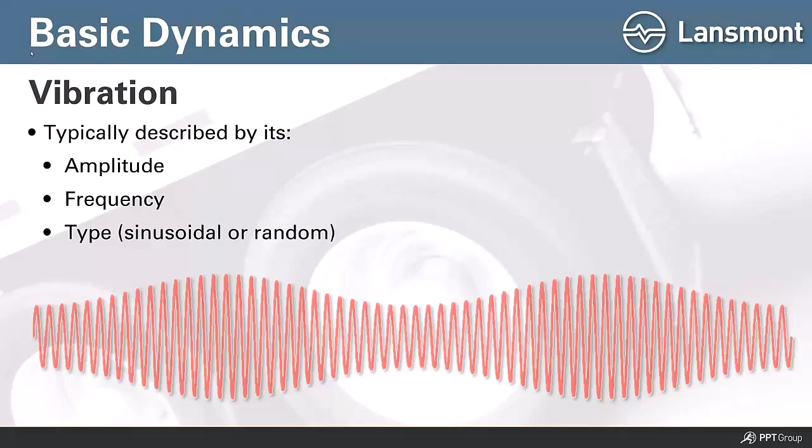And then lastly, two different types of vibration. Today I'm going to talk mostly about sine vibration, sinusoidal vibration. But we also describe vibration in our testing world in terms of random vibration. And I'll differentiate between the two as I move forward here.

So this is what sine vibration looks like. Sinusoidal vibration, that's basically a sine wave of a very specific discrete frequency. And it's, you know, what you can imagine, up and down. You see the sinusoidal pattern, it's repetitive.

And that motion we can replicate or simulate in the lab on a vibration test system, but that motion really does not occur like that, that discretely, in, let's say, the transport environment. You might see bits and pieces of that, but it's really for us used more as an engineering tool. If we're going to use what's called sinusoidal vibration, we use that in the test lab as an engineering tool versus using it to simulate anything in the real world.

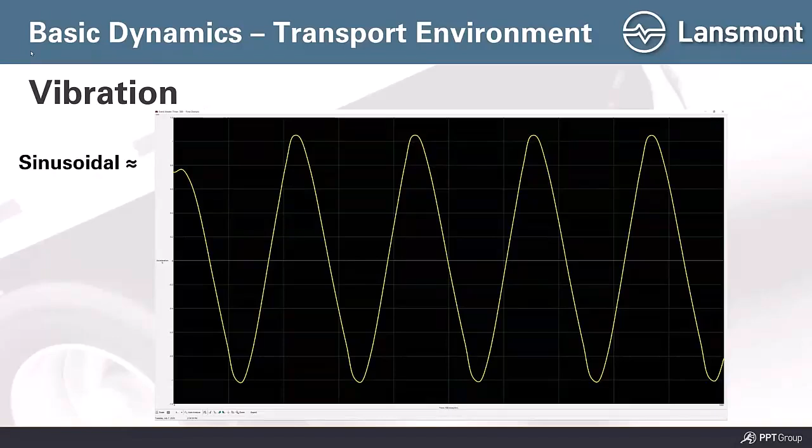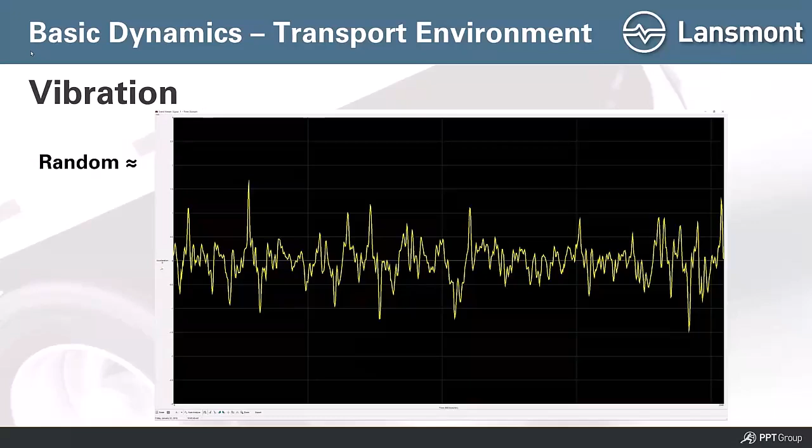What does a delivery van look like? What is a steel spring truck, an air ride truck, maybe a truck in China, maybe a truck in India, maybe rail cars in Europe? We use a summation basically of all that noise that we record from the real world and come up with these test profiles that simulate those environments.

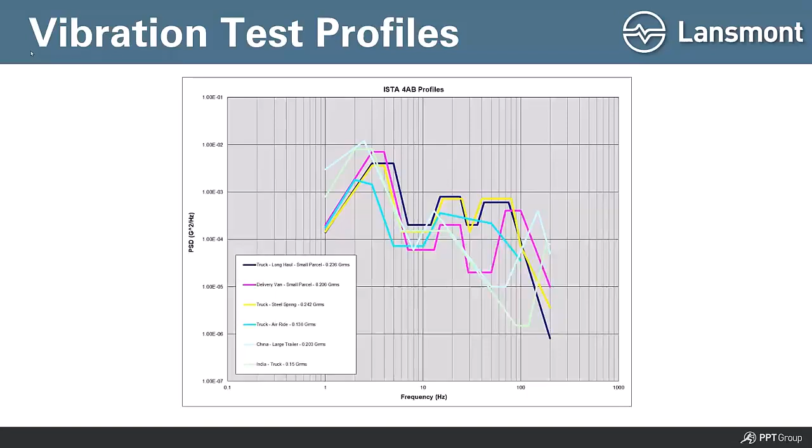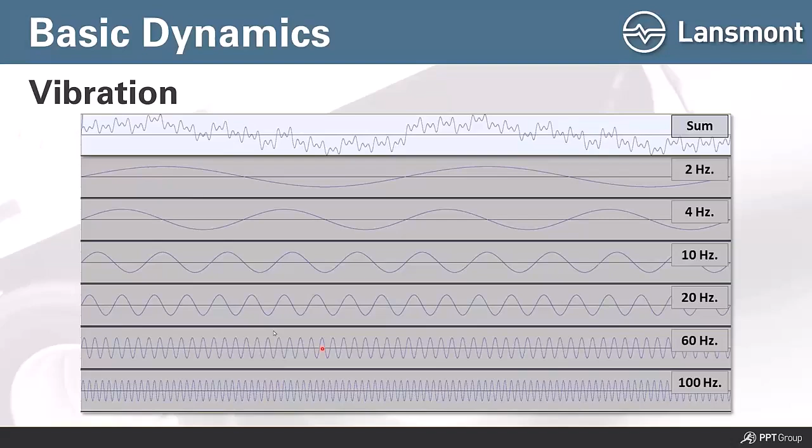If you look at this top signal, think of it as more like noise or a real world signal that you might measure out in the supply chain. That signal is made up of some of this 2 hertz signal, some of this 4 hertz signal, some of this 10 hertz, some of this 20, 60, 100 hertz. All these different types of sinusoidal vibration content are evident in that signal. And so computers, with proper analysis, are able to look at that messy signal and pull all of this content that you see down below here to build these types of summary profiles.

So when we look at this signal, if I show those same signals, we can say, that top waveform that I'm looking at here, the 2 hertz content, basically is a summary of that 2 hertz content we use to create a breakpoint in our PSD profile that simulates air ride transport. We also can do the same thing for the 4 hertz content, the 10 hertz content, the 20, the 60, and the 100 hertz.

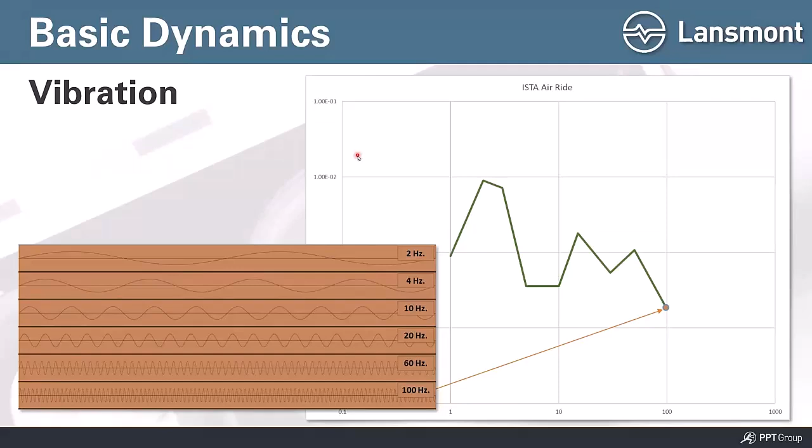So basically, we do the statistical kind of analysis on real world data, dissect it, looking at different frequency bandwidth filters, to say, what does the 2 hertz look like? The 4, the 10, the 20, the 60, and the 100 hertz? What do those different types of inputs look like? And we plot them on one of these PSD profiles.

Why are there these high points here versus maybe low points here? When we look at these kinds of plots, the y-axis is intensity. So why is there a higher type of input here versus down here? Well, that's because in this case, an air ride truck transport, these are the airbags. This is the suspension underneath a vehicle, and that's where you see big input at that specific frequency. It's related to the suspension of the truck.

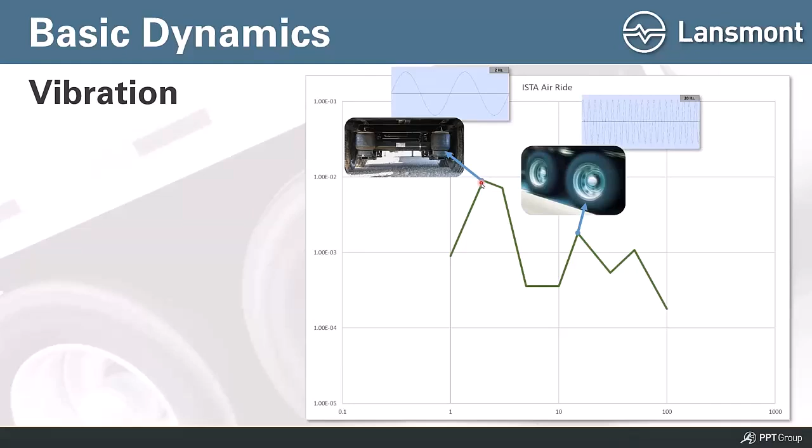Well, what about the next little bump? Well, that next little bump is related to input from the tires, the rotation of the tires or the wheels as they spin at different speeds.

You see very specific types of higher input, or comparably higher input, at that frequency range. And then even at the higher frequency range where there's another peak, you can relate that more to the structural rigid body members of a transport vehicle, like a truck trailer: the underneath of the frame of the structure, the side walls, everything that goes to hold that trailer together rattles, or responds to input as it's moving down the road. And you see that type of input at that frequency range.

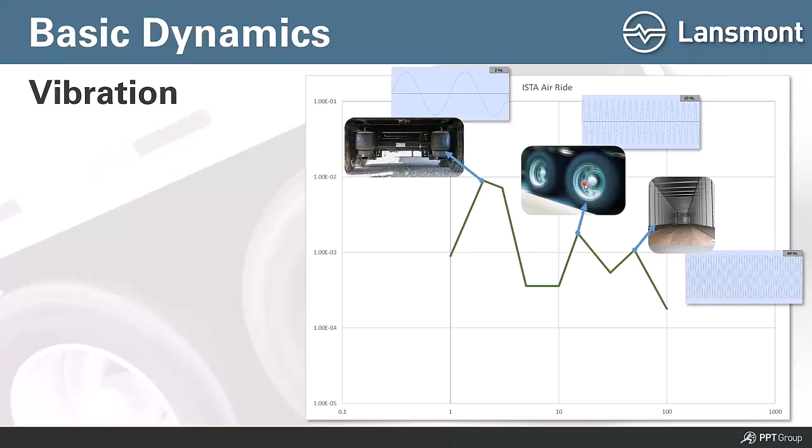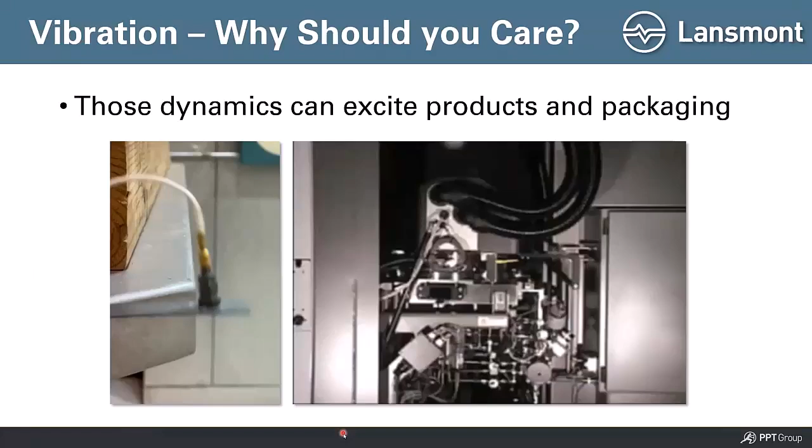The video on the right is actually a video of the inside of a piece of very expensive test equipment that's being tested on a vibration system. I'll play it now, and you can get an idea of how much different bits and pieces of tubing and hardware inside here move in response to a vibration test input. So all those pieces inside are shaking, they're resonating basically at, in this case, a specific frequency.

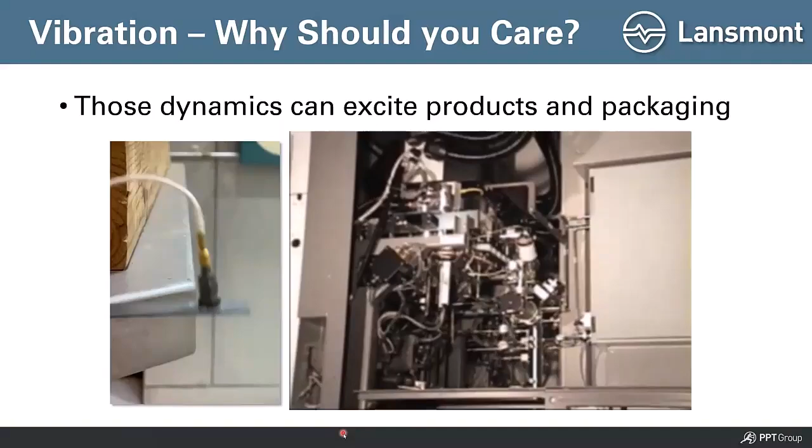And so it's important for us to understand at what frequencies these different pieces and components get excited and how excited they get from an overall amplitude perspective. So we want to know what frequency they like to shake at, and we want to know at that frequency how excited they actually get. And there's a method to how you go about making those determinations.

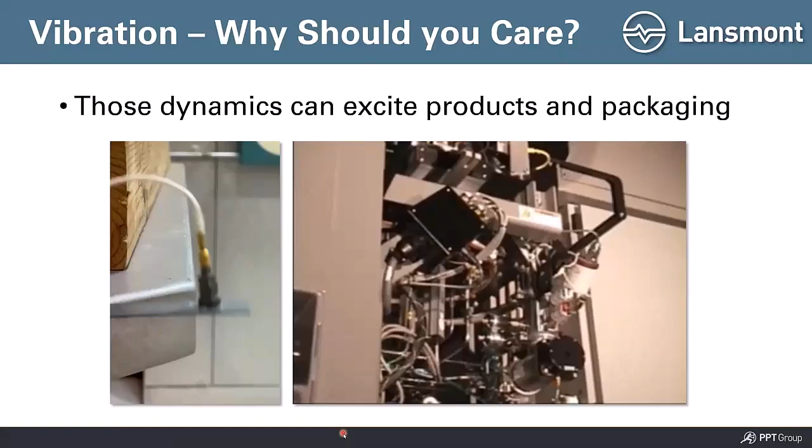In the laboratory, and I'm going to actually show you how we go about this, we're able to generate these resonant frequency transmissibility plots. And basically when we do that, what we're trying to determine is the frequency at which something gets excited, which I'm showing here, and the amplitude, which we describe in terms of what's called transmissibility.

So if we put a product on a table and move that table at a controlled amplitude, and the product or component on the table is shaking the exact same way and amplitude as the table, it's got a 1-to-1 ratio of the response of the component to the table input. At some point, the response of that component or product is going to be greater than what the table is inputting into that product. And so that's what we're trying to identify with one of these transmissibility plots: what is the frequency where that component gets excited, and what is its overall amplitude.

And this is the only real math I'm going to include in this, and it's meant just to show the relationship of how you determine the natural frequency of a spring mass system. Forget all the math in there, but what it says is natural frequency is 1/2 pi times the square root of, and K stands for spring constant, meaning the stiffness of a spring. G is a constant, acceleration due to gravity, and then W is the weight that would be placed on that spring. So in a spring mass system, you have a spring and you have a mass. The spring is defined by K, and W is defined by the mass of the item.

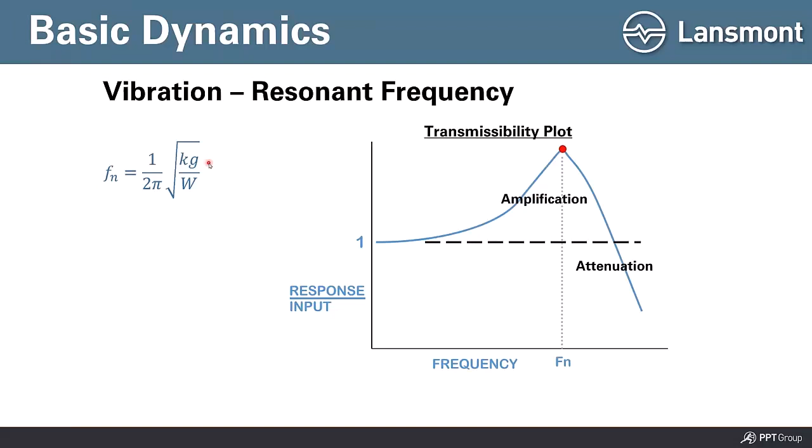So here's my first video showing what that might look like as we try to determine the natural frequency of a spring mass system.

What I'm showing on the screen are 3 different spring mass systems mounted to a vibration table. In each configuration, the spring, K, remains the same. But what's different here are the masses. There's a heavier mass here, there's a lighter mass here, and there's an even lighter mass in this situation.

So understanding that relationship, you would expect that this spring mass system would have a lower natural frequency than this one, and this spring mass system would have a lower natural frequency as compared to this one. So now I'm going to play this video, and what you'll see and hopefully be able to hear is that the table is sweeping, meaning it's changing its frequencies over time from lower to higher frequencies, and you'll see the response of the springs change as a result of that. So I'm going to go ahead and play that now.

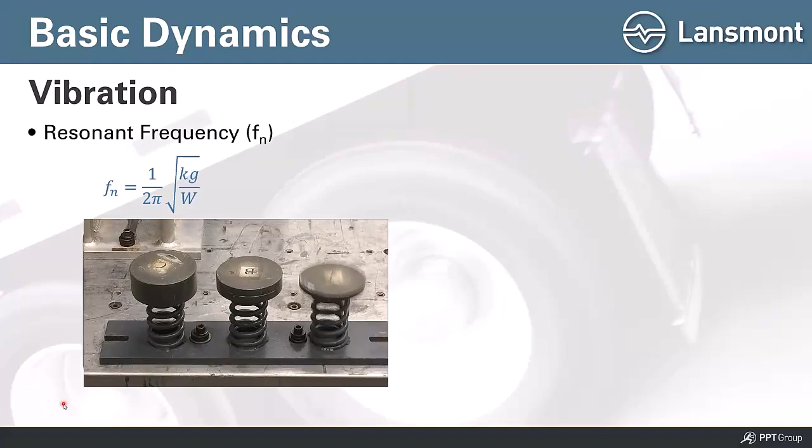So you can see that each one of those springs got excited at different frequencies and in different frequency ranges. And we're able to document that by what are called transmissibility plots. The plots on the right were actually generated from a vibration test system, and they show the individual transmissibility plots for each of those spring mass systems. The first one, the heavyweight green one, had a natural frequency of 28 hertz. The middle one, 35 hertz, and the light one at 46 hertz.

And so we're able to document that, and again, this demonstrates that whole relationship of K being the same for those 3 systems, but heavy mass, bigger mass, lower natural frequency. This one, middle mass, a little bit lighter, a little bit higher natural frequency. And then the very light mass, so the smaller this number is, the bigger that number becomes. So that kind of validates that whole relationship.

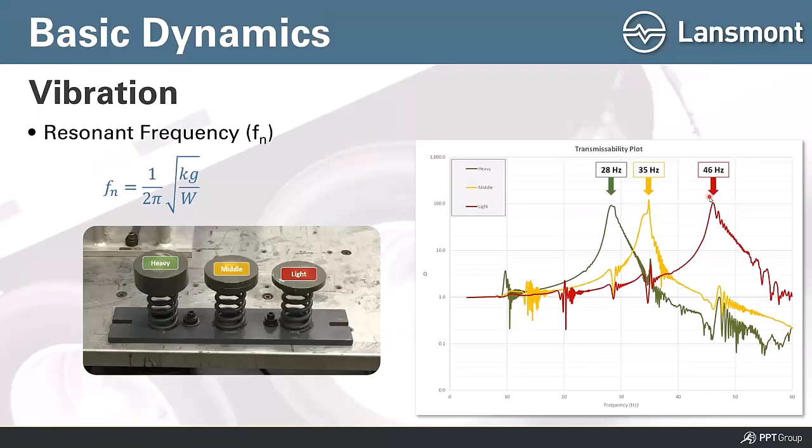You basically shake your table doing a sinusoidal sweep from 3 hertz on the low end at a constant acceleration level, G level, and you sweep to a high end frequency breakpoint of 100 hertz. You can change those depending on the range that you really want to address from your testing perspective. But for the transport world, 3 to 100 hertz is considered to be a pretty good wide dynamic frequency range, where you would probably see the most significant inputs from any transport vehicle.

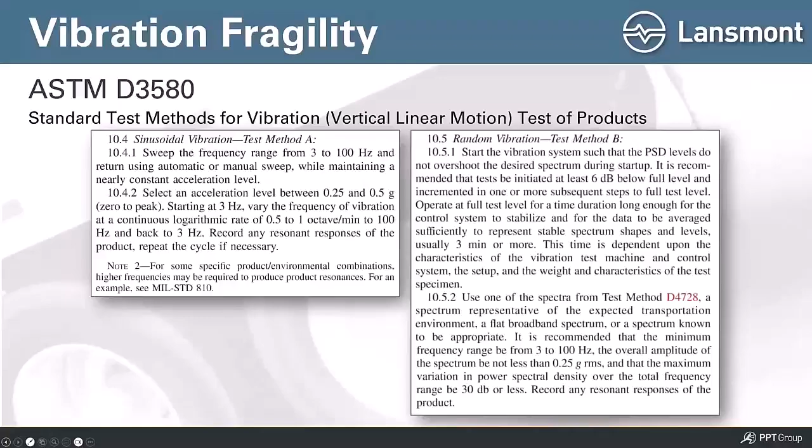You can hear it. Oftentimes you can hear things when they resonate, and you can use sensors, which I'll show you, basically accelerometers attached to your products to measure the response when you're putting it through the sweeping inputs. This is the type of vibration. This is a vertical vibration test system.

Obviously, a number of different types of vibration systems. This is a Lansmont system, pretty big one, or middle of the road for us. They can be as small as 23 centimeter square tables, upwards of large enough to test big, let's say, displays from LG, Sony, Samsung. Large displays, they can be 200 centimeters square, quite frankly, if you have products that large that you can shake on these tables.

So you use machines like this, and here's just going to be a video showing what the sinusoidal input looks like. It's going to start by showing you what the table looks like when it's moving, just for visual perspective, at 1 hertz, and then 2 hertz, and then 3, up to 5, to show what those different frequency inputs look like. And then I'll play back a whole sweep from 3 to 100 hertz in a sped up fashion, so you can get an idea what that looks like.

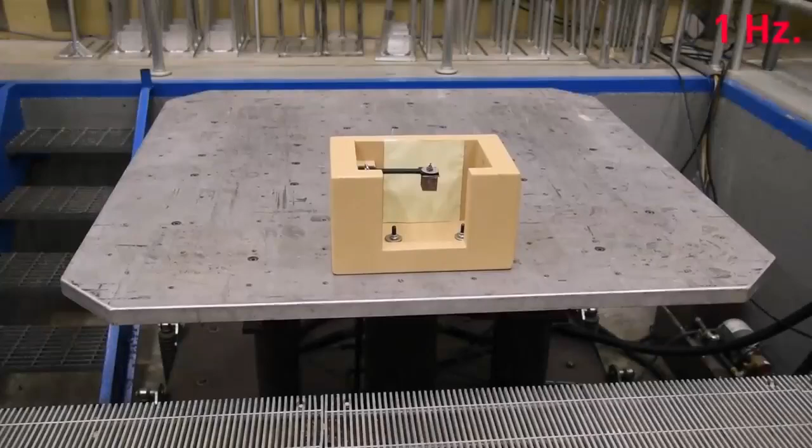That's a 1 hertz motion. Up and down 1 time every second. That's 2 hertz. Up and down 2 times every second, so on and so forth. Now this is playing back a complete sweep from 3 to 100 hertz, but at 5 times normal speed, just to give you an idea what's taking place.

And I'm going to, if I can pause it, sorry, with my, I think was my laser pointer.

What you're seeing is the white horizontal line is the demand, what we're asking the vibration table to do, which is a sweep from 3 hertz on the left hand side all the way out to 100 hertz on the right hand side. And this line here is what we call the demand line. That's basically saying, in this example, we want the table to shake with an intensity of a half a G of input, vibration intensity, across that whole frequency range from 3 to 100 hertz. So we sweep across that whole frequency range.

And this is basically to try to show a simplified spring mass system on a vibration table, and we're looking at the response, in this case, visual. So this is just showing what the mechanics look like from running the test. What's being displayed right now is what we call the control channel, or the accelerometer that's mounted to the table, that's controlling the table to do a very specific thing. There's no data right now shown on the screen to display what's happening with our spring mass system on the model over here. So I'll show you that moving forward.

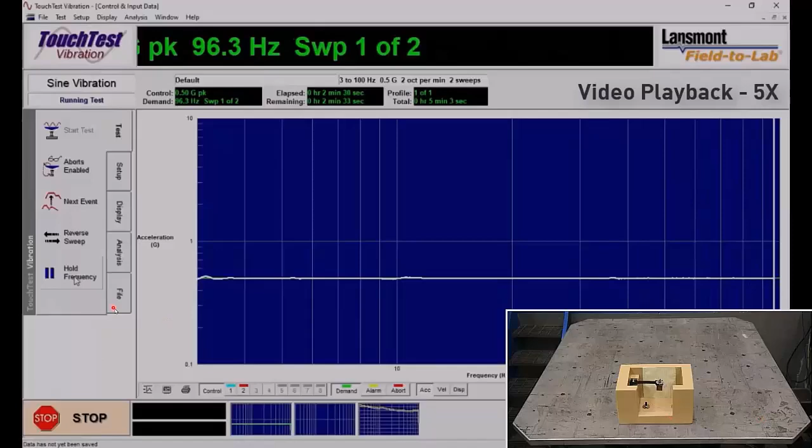How do we go about doing that? We use things that are called response accelerometers. This is a teeny little transducer here. PCB is the brand in this case. A little transducer that we can plug in to our control system, and then we can attach it with a cable to our spring mass system, which is what I've done here. And now I have an instrumented setup that's going to allow me to measure, not just visually or audibly, but measure with my vibration control system what that resonance is and what the amplitude is.

So now, if I play a video showing that, on the bottom right, you'll notice that the display looks different, because I'm plotting data coming from that sensor. I'm going to speed the video up. It's a slow process, so I've sped it up here 4 times. And here about 10 hertz, you see the red trace going up, and there's resonance of that beam, spring mass system. You can see how it gets excited at that frequency. And then stops.

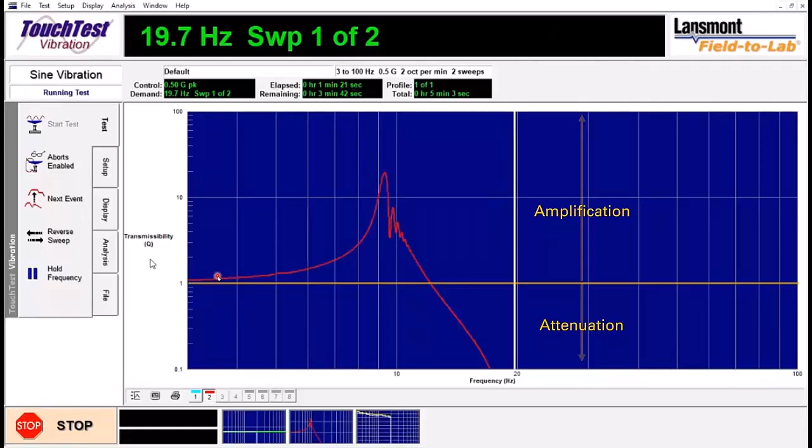But anytime that the signal goes above that line, that's an indication of amplification, where the beam is now getting excited at the end of that beam where the mass is. So above that 1-to-1 line, amplification. Below that line is what we call attenuation. So attenuation is actually where the energy that you would measure out at the end of that beam is less than being put into the system.

And so in this case, what I'm really interested in, of course, is where is the natural frequency of that beam. In this case, I can identify that at this frequency. It was just a little bit more than 9 hertz. And if I look at the y-axis, that also says the amplification or the transmissibility was about 20 times, almost 20 times. So at that frequency, about 9.3 hertz, the end of the beam was shaking almost 20 times more than the table was inputting into the system. So that's an indication of a pretty significant amplification at that point.

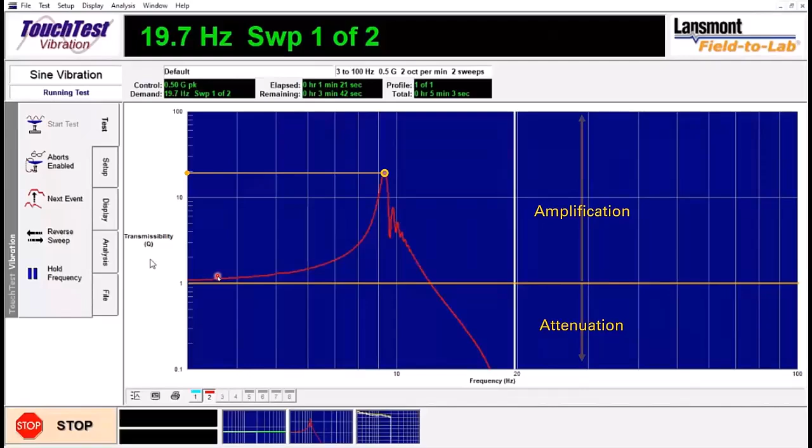So there's my simple, modeled up spring mass system, a product, so again, a beam suspended, a mass suspended at the end of that beam. When I say beam, you can think of this as the spring constant, right? It has to do with the stiffness of this system. Instead of it being a spring, it still basically acts like a spring. It's a beam with a mass suspended off the end of it. And you saw how that shakes in the previous videos.

So what could I do? If I understand this relationship again for the spring constant, what could I do if I wanted to change the natural frequency one way or the other? If I wanted to raise the natural frequency, stiffen it up, one thing I could do is shave some of the mass off of the end that I'm suspending. If I make the mass lighter, so this number would go down, the natural frequency would go up. So that's one way to stiffen the system.

Another way would be just to add a structural member, right? If I have an issue like a real product, maybe a circuit board or something in the back of a piece of equipment that's suspended like that, maybe a power supply, it might be a hard drive, any kind of component that is cantilevered or suspended. If you add a structural member, what that's doing is raising the stiffness. So that would make this number, the K, spring constant, stiffer, which would raise the natural frequency.

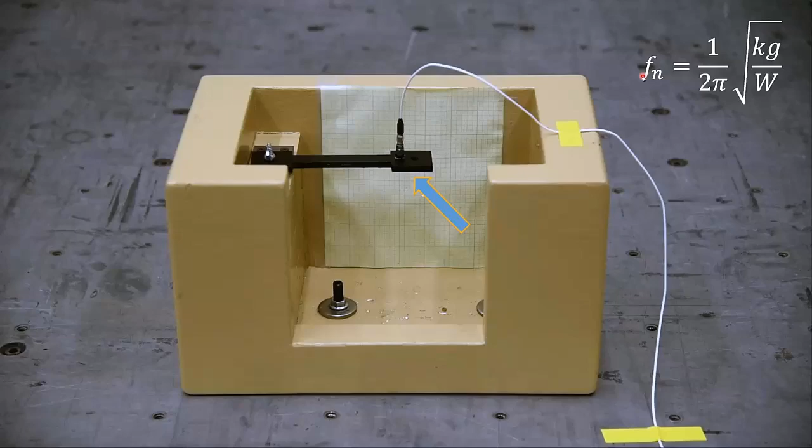And you would expect by making this number much smaller that the natural frequency that I'm going to identify should go way up or up, right? And I guess without knowing if it's way up or just a little up, we run the test and let the data speak for itself. And so that's what you're going to see now in this example. Same thing that I ran before with the mass, but now without it.

And right about now, it's passing through where the natural frequency was with the big mass on the end of it, there at about 9.3 hertz. Now we're getting out to 20 hertz and beyond, and the beam isn't resonating or shaking yet. Just kind of starting to raise, you can see in the signal, and there it goes.

The amplification is still, in this case, just by chance, very high at that frequency, but by stiffening it up, by lowering the weight, we shifted the natural frequency almost 40 hertz to the right, which in many cases is a really good scenario to shift product or component natural frequencies to higher frequencies, have that natural frequency be out high.

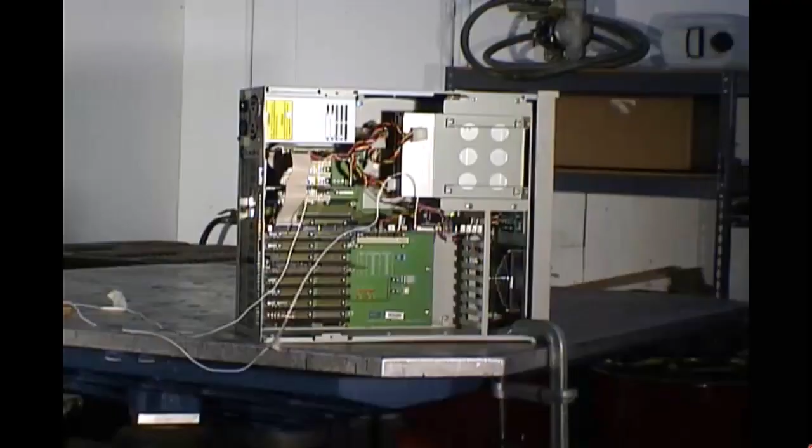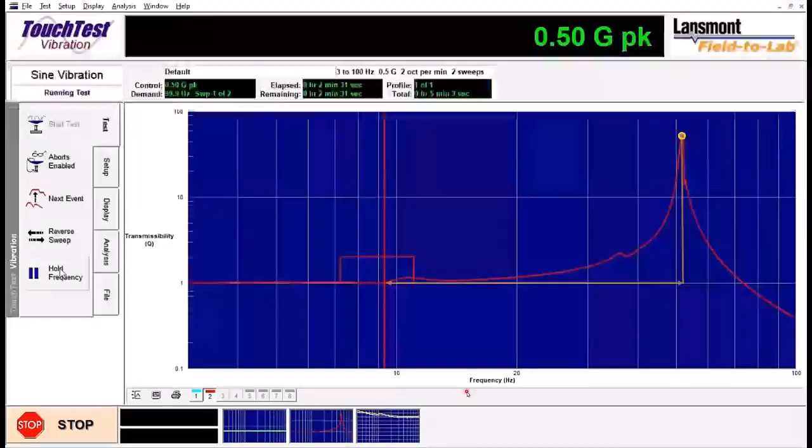So what that was video of is basically a desktop computer that was opened up, showing the insides of a computer and circuit boards inside that computer, how they're responding at different frequencies. And so if I go back there, I will show you that one more time. You're seeing different resonances.

So one was a long, full-size computer board card, which you see on the left-hand side, looking at very high-speed video, and then at the top left you see the shorter circuit board resonating at a different frequency. And that might look insignificant, the amount of motion that takes place there, but remember, that was in slow motion. At 28 hertz, that's shaking up and down 28 times a second. At 52 hertz, it's shaking up and down 52 times every second.

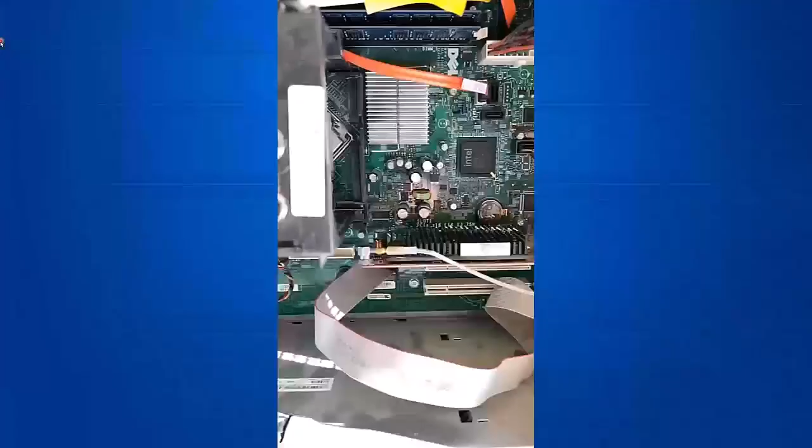And this is another video taken just last week of another test similar to this, showing a circuit board inside a computer shaking at a frequency in that same ballpark. Normal video speed, and then slowed down 8 times. And if you notice, that board is shaking, a lot of displacement on that board because it's cantilevered from the back plane. It's kind of hanging out there, right? So it's able to move, almost like the beam I was testing in my little model.

But you see everything, even on the back plane, even this backup battery, there's things that are flexing as a result of that. And that flexing can cause things to eventually get damaged or fail, like solder joints, or maybe that battery, because of the flexing of the board, is going to back out of its nesting position and might lose that connection. It might pop out, or it might just become unseated somewhat, so that the connection is no longer there for the backup to be held in place.

And here's a screw that's holding that backplane board inside the chassis. Things like these, because of that motion, can become loose and back out, and that's not atypical in a very large piece of equipment. If you're testing equipment like that in the laboratory on a vibration system, what you might see during a 1 to 3 hour test is parts falling out of that product onto the table itself, almost like it's raining parts. That's because all those parts, fittings, and fasteners are responding to the vibration, resonating, loosening, backing out, and eventually falling out.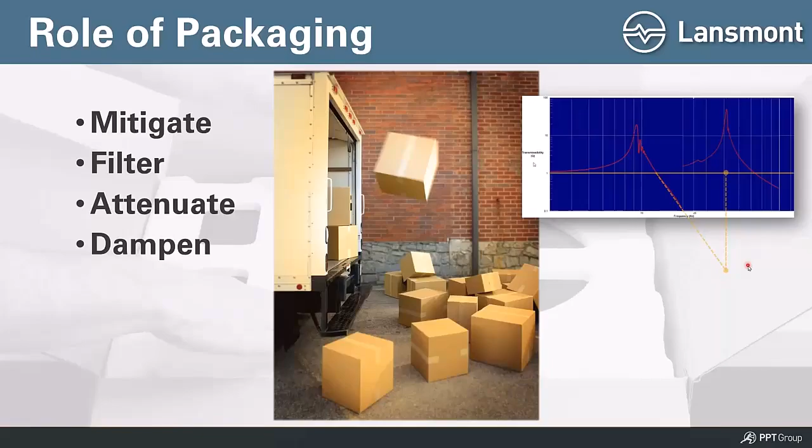And that's what we'll talk about more as we move forward into the next webinar, which is scheduled for Tuesday, October 24th, is really, all right, let's talk about how we define those types of cushioning and mitigation properties from a packaging material perspective. So I wanted to just point that out, that we'll get more into that detail next go round.